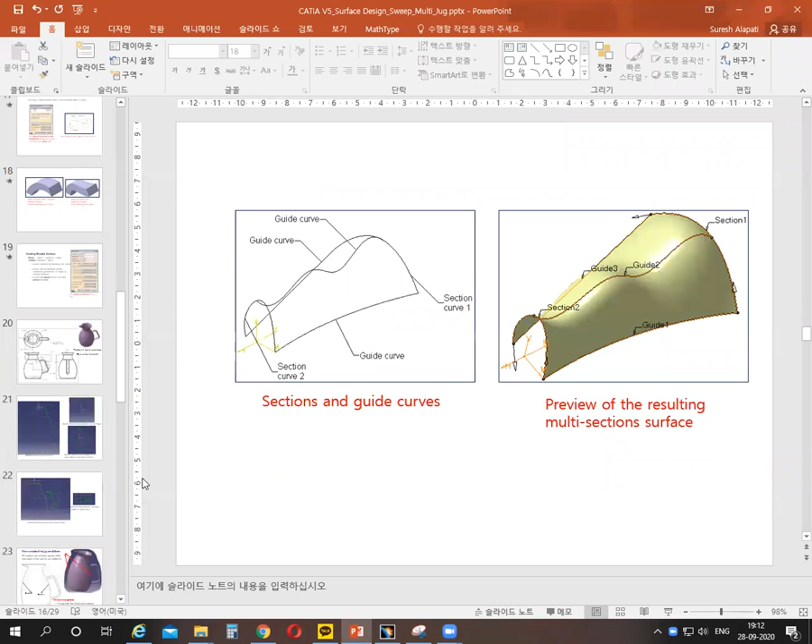Okay, after making the revolution, what we do is we have to make a multi-section surface. For making a multi-section surface, you need two sections, right?

One section is sketch, this one, here. The bottom sketch of diameter 90, and you need 2 points, here and here, because we are making points to connect the multi-section solid in a specific manner, using a guide.

So we need to create 2 points with the diameter 90 circle, and another sketch we have to make above that sketch, with the gap between these two sketches as 20 millimeters, and we make another sketch, this one, top sketch.

So like this, we join the top and bottom sketches using multi-section surface, by following a guide here. This is one guide, and another guide is given by closing point, closing point of this one and this one.

I will explain more clearly when we do this in CATIA. So first make this circle, 90 millimeter diameter, and 2 points, here 2 points.

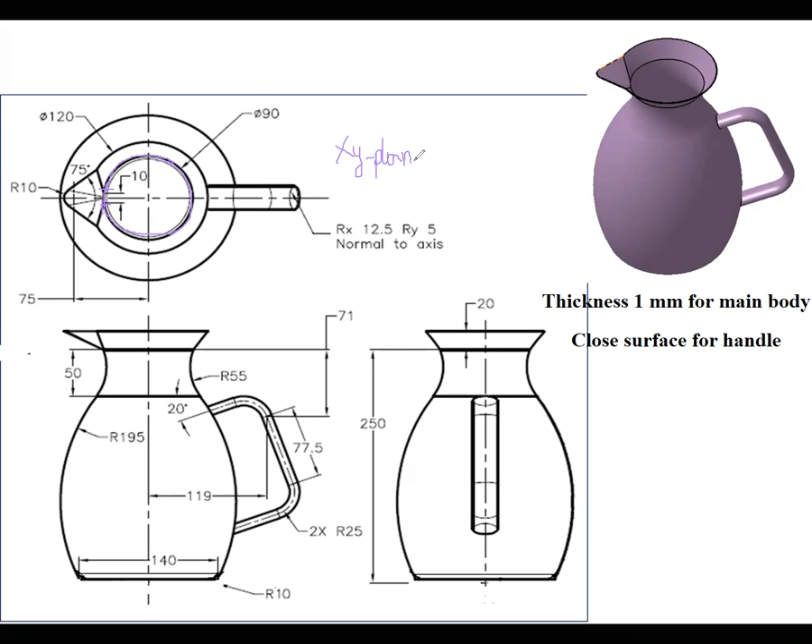We have to make it on the XY plane, because that is the top view. So after making the revolve, select the XY plane to make sketch 1 for the multi-section surface.

So we select a circle, center point of the circle is the same, 0,0, center point of the jug, center point of the jug.

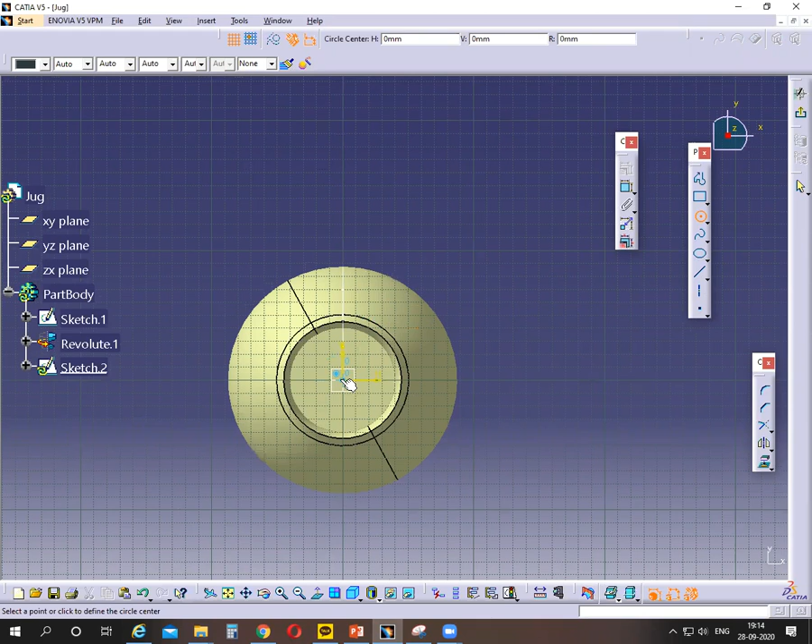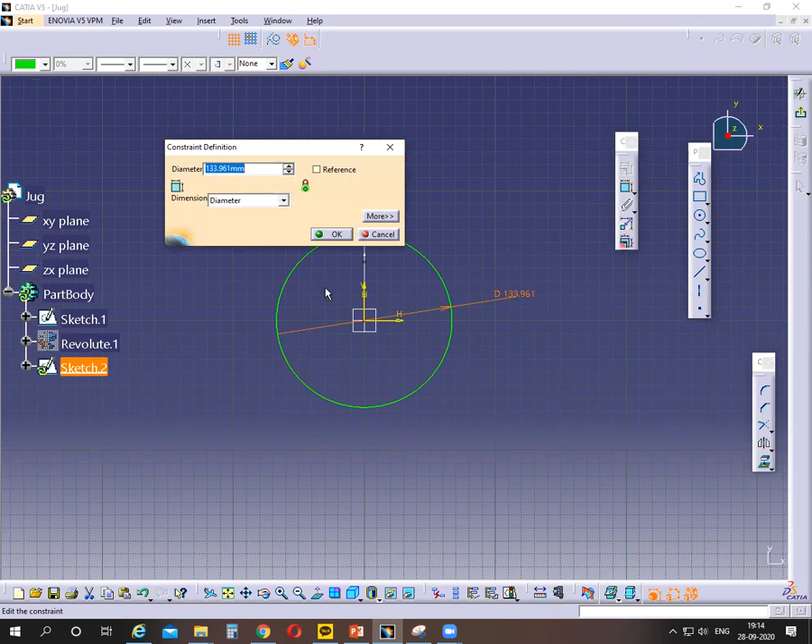So the diameter of this one is 90 millimeters. And here, opposite to the handle, we have to make a point here, not here, here we make the point.

So on the circle, that point is touching the circle, just left side or right side of the vertical axis. From the vertical axis to that point is 5 millimeters.

So you can make another point, or you can mirror this point, and give 5 millimeters, mirror is also possible. I'm making another point and giving the same distance from the vertical axis to that point, 5 millimeters.

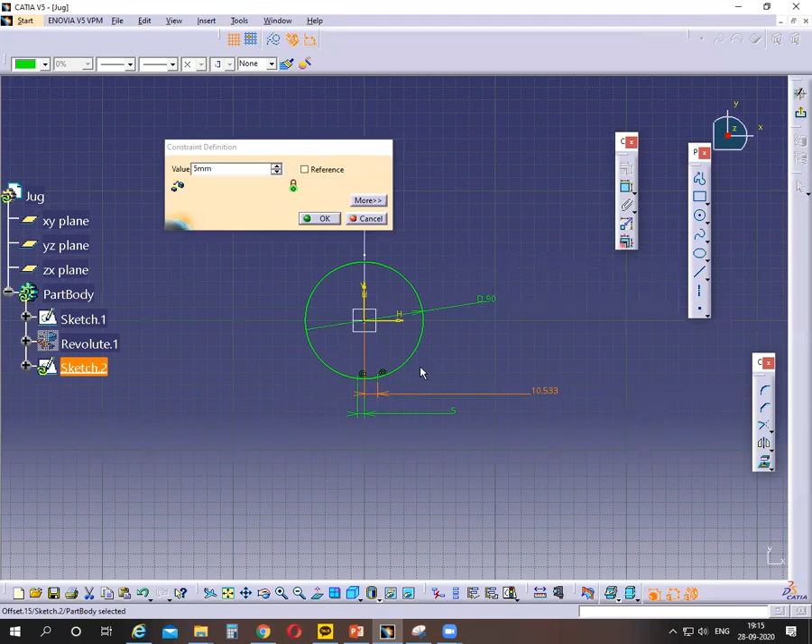So sketch 1 got finished for the multi-section, now sketch 2. This is one sketch for the multi-section surface, the bottom sketch, and I need to make another sketch, like this one.

So we have to make another sketch on a different plane. When we use a multi-section surface, we need to create sketches on different planes - same plane means the multi-section surface does not work. So we select the XY plane, here this is the XY plane.

From that plane we make another sketch at a distance of 20 millimeters, so we need to create a plane from that XY plane. After exiting the sketcher, we select the XY plane, because we have to create a plane at a distance of 20 millimeters from the XY plane.

So already 20 millimeters in the upward direction. Some people may have it in the downward direction, so we change the reverse direction, upward or downward. In this case, upward direction.

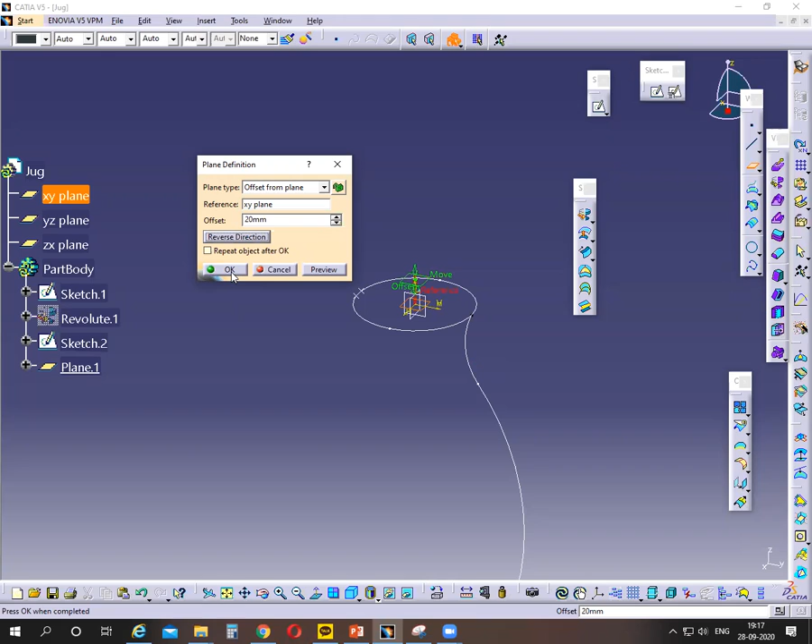And make sketch on that plane. So select the plane and make sketch. I make a 120 millimeter diameter sketch.

And first, how I make this sketch - I make the sketch lines at an angle of 75 degrees, half of the 75 degrees. Let's make this sketch.

The diameter of the sketch circle is 120 millimeters, the big circle diameter. So 120 millimeters.

After the 120 millimeter diameter, we make another small circle here. From the center point of the jug to the center point of the small circle is 75 millimeters.

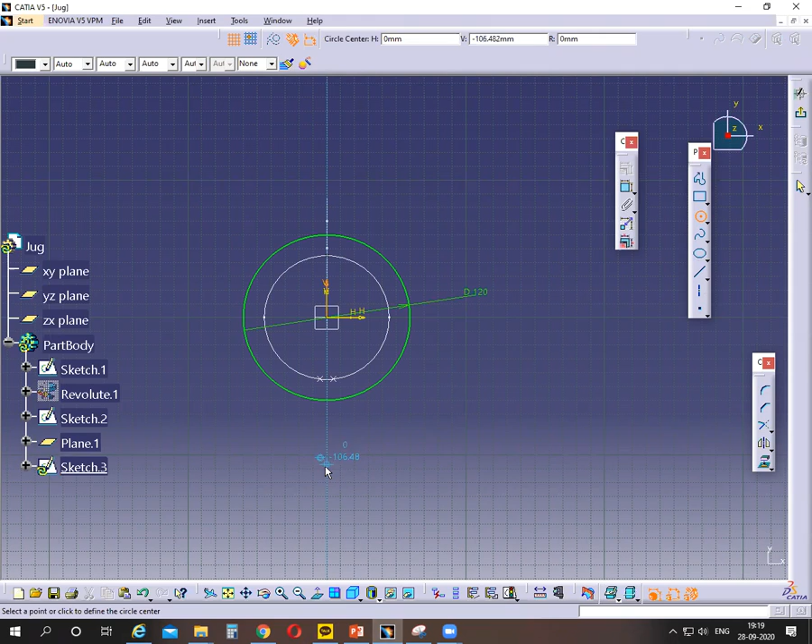So you have to make this sketch, the small circle, on the vertical axis. Center point should be on the vertical axis, not left or right of this, exactly on the center, exactly on the vertical axis.

Radius 10 millimeter, so radius 10 means diameter 20. You can also give the radius as 10 millimeter. And the center point of this circle to the center point of the jug is 75 millimeter.

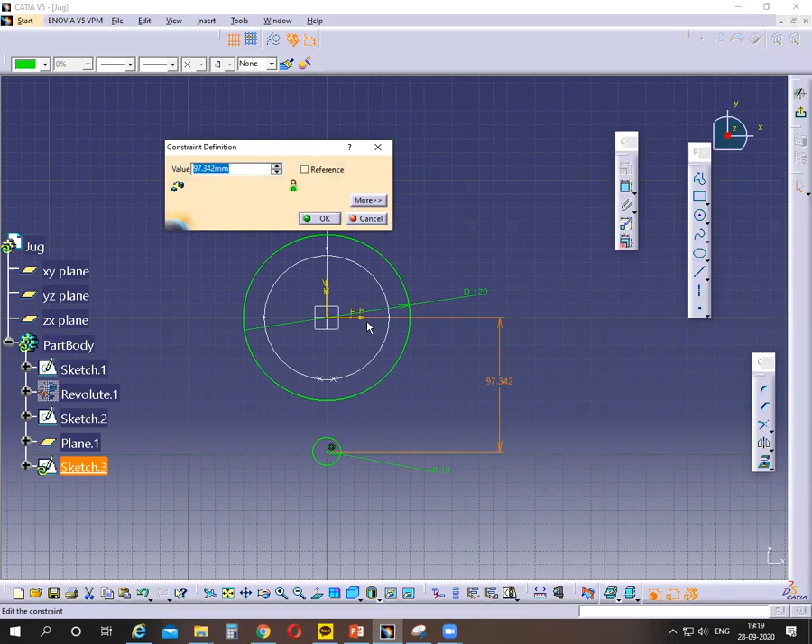And here we join these two circles by a line. Starting point is along that circle and ending point is on another circle. If you want to make auto constraint, yes, that should be tangent, or you can give it later. To avoid auto constraints, just touch on the circle.

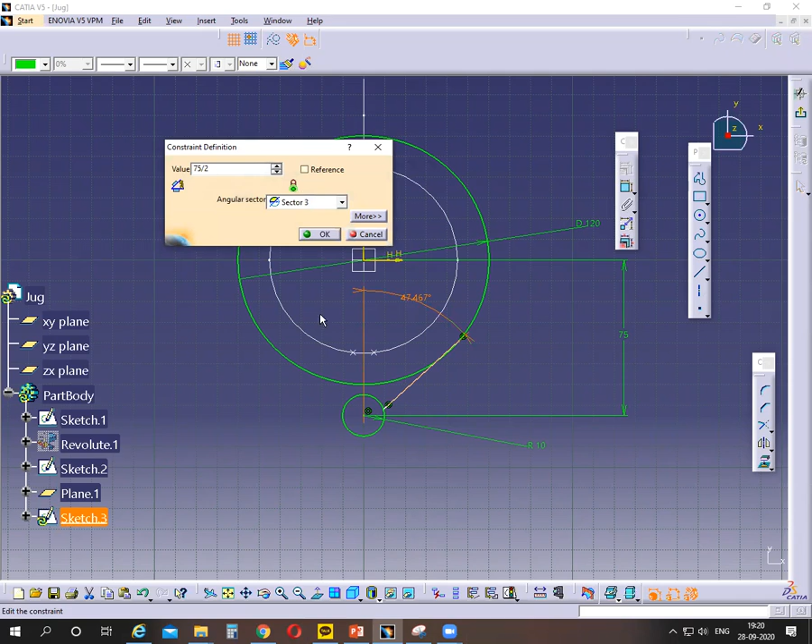So what is the angle? The angle between this line and this line is 75 by 2, 37.5, right? Because total angle is 75. From this vertical axis to that line, we have to select this vertical axis and this line together to give the angle constraint. So you can use 75 over 2 or just 37.5, and the software automatically calculates it.

So 75 by 2, and here there must be a smooth connection between this circle and this line. But here there is no smooth connection. Here no, but here it is a smooth connection, so we need to give a tangent constraint.

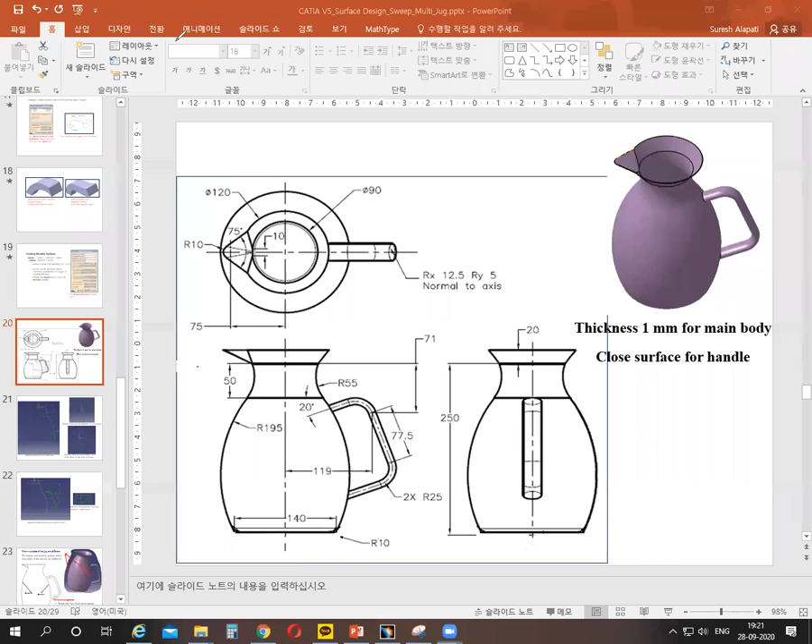If already given, you don't need to give it again, but if you want to give the tangent constraint, select this line and this circle, and give the tangency constraint.

If you want to make another line, follow the same procedure, or you can just mirror. I already provided the dimensions 37.5 and the tangency constraint, so then I can mirror this line to the other side.

So click on that line and click on the mirror tool in the operations toolbar. Select the line axis, the vertical axis. Click on the line you want to mirror, click on the mirror tool, and click on the axis with respect to which you want to mirror. That is the mirror option.

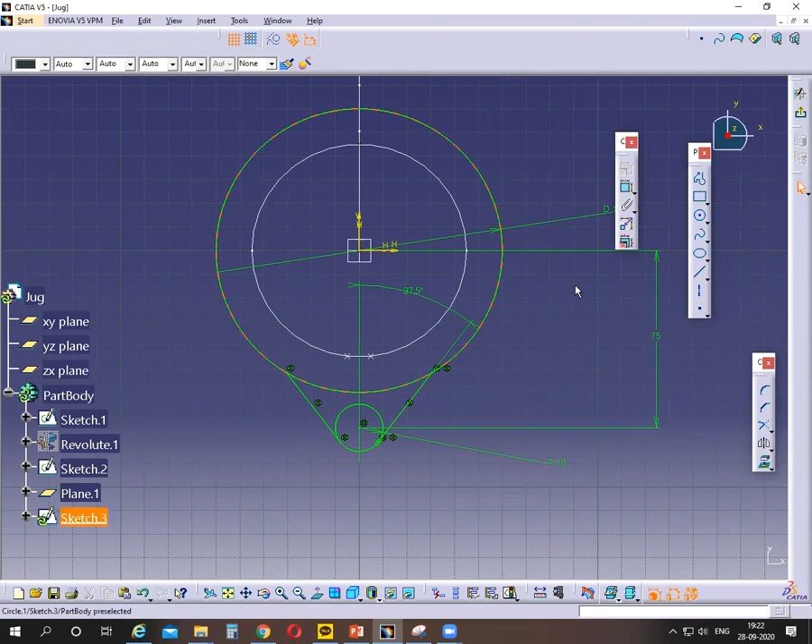Now I have to delete the remaining portions of the circle. I have to delete this one, this one, everything. So I use the eraser, quick trim. If you double click on this tool, or any tool, you can use it continuously, so you can erase this line and that line without clicking each time, since we have to do it multiple times.

Now I have finished sketch 1 and sketch 2 for the multi-section surface. I mean sketch 2 and sketch 3. Sketch 2 is the first sketch for the multi-section surface, and sketch 3 is the second sketch for the multi-section surface. After finishing this one, exit the workbench.

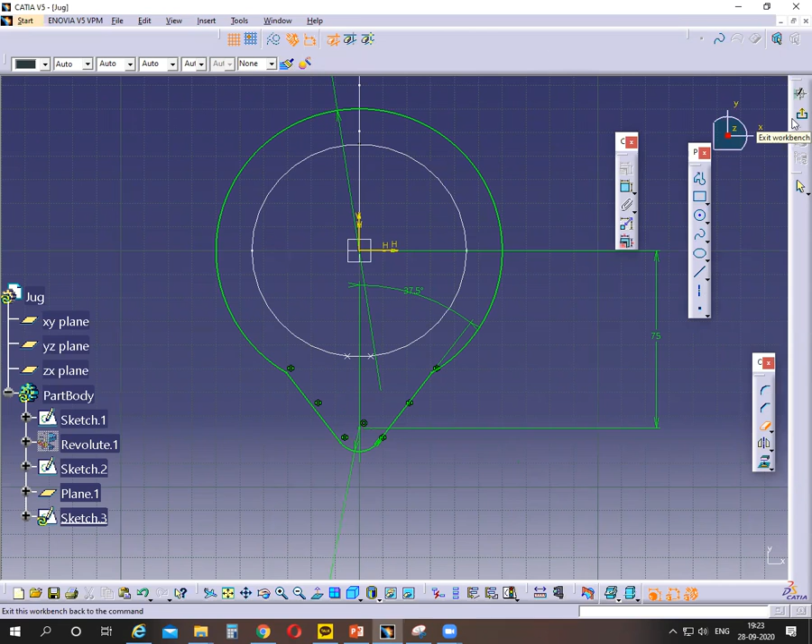Here we need to provide a guide, a line, because we have to guide that multi-section surface in a specific manner. It should follow these guides, like this one. So we can provide a guide, but only one guide, not both sides, either this side or this side. If you provide two guides, you will get a different multi-section surface.

So for the guide, I provide it using a line, because that is a straight connection. Using a line, select line, 3D line.

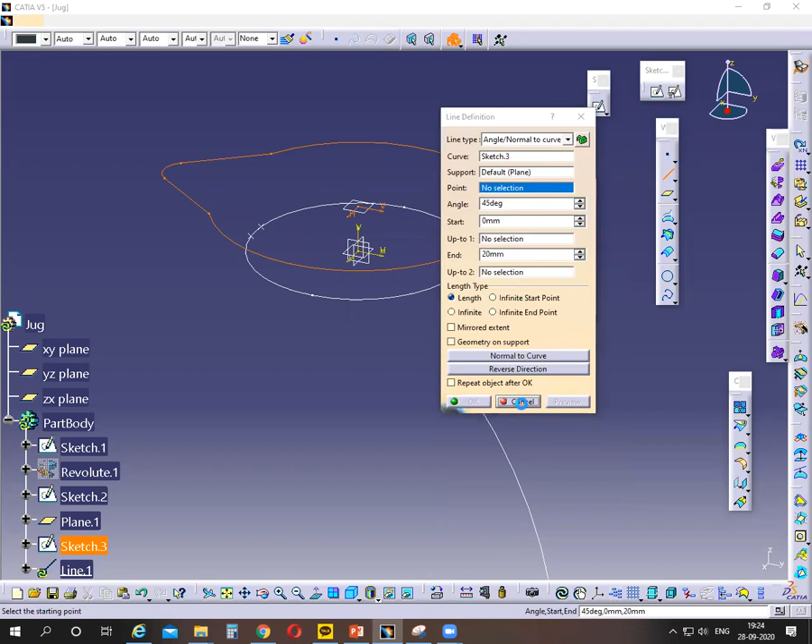So 3D line here. This one is a 3D line, not a 2D line. So 3D line, to join 2 points. If you select a point automatically, here the sketch 3 got selected, right? When you click on line, you will get some different option. But deselect the sketch 3 and click on line.

So the main option for the line type is point to point. So we have to select this point, and this point you created, right? So create this point. Just click on the point, not curve. Many people click on the curve. Click on the point, just point. This point, and click on this point you created. Not curve, point.

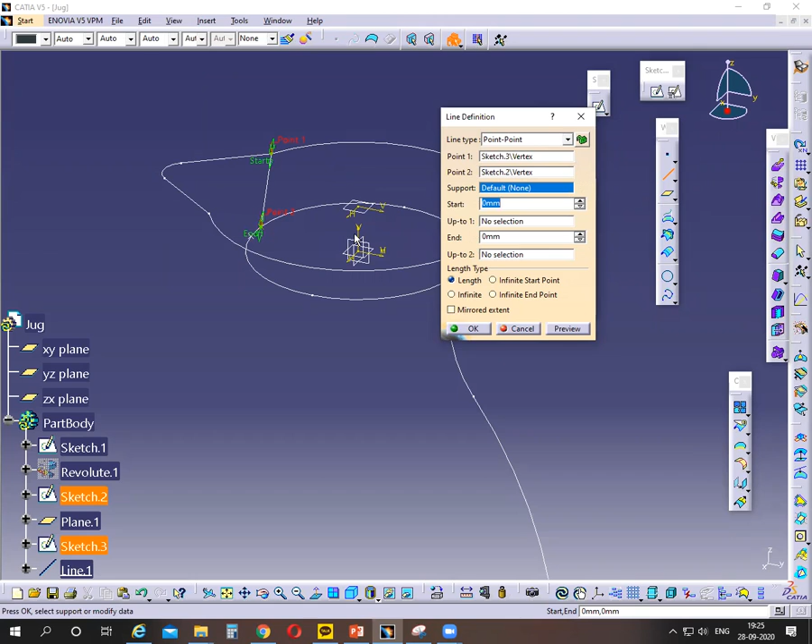So now I joined those 2 points using a line. That is a guide for the multi-section surface. So what I do is I select the multi-section surface tool, and select which sections I need to join using multi-section surface. So this one, sketch 2 and sketch 3.

Unfortunately, when you select section 1 and section 2, for section 1 the closing point is here, but for section 2 the closing point is here. But I have to make a connection like this one, right? So you need to change the closing point. Otherwise it is connected like this one, and you will get some different shape. So you need to join this point and this point, and that connection can be taken care of by this one.

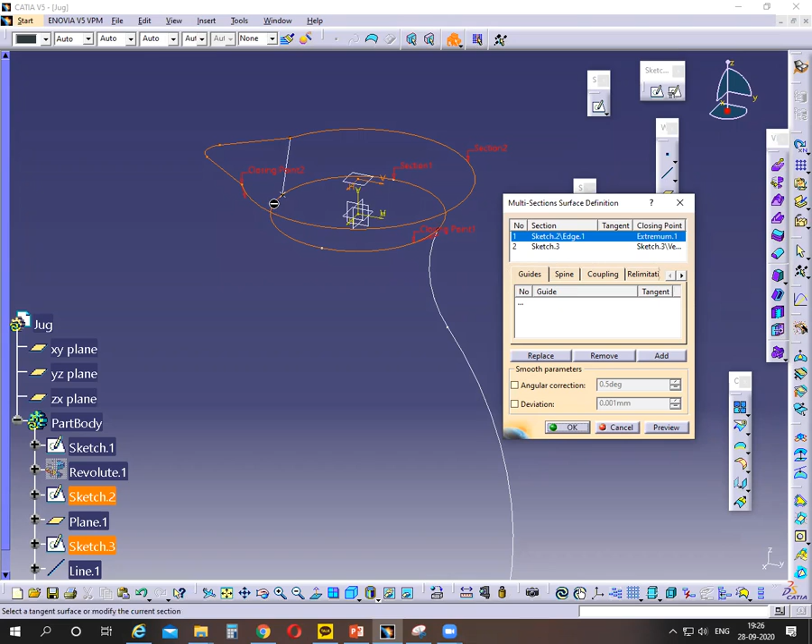Closing point. So replace that closing point. In V6 what you do is click on the closing point, and click on the point where you want to change it. But in V5, you have to right click on the closing point. Move the mouse there and right click there. I moved the mouse here. Do not click. Right click, and the replace option. I want to replace this closing point from here to here.

But in V6 it is a different option. You have to click on the closing point, and next you have to click where you want to change the closing point. So that is the only difference between V5 and V6. Remaining all things are same.

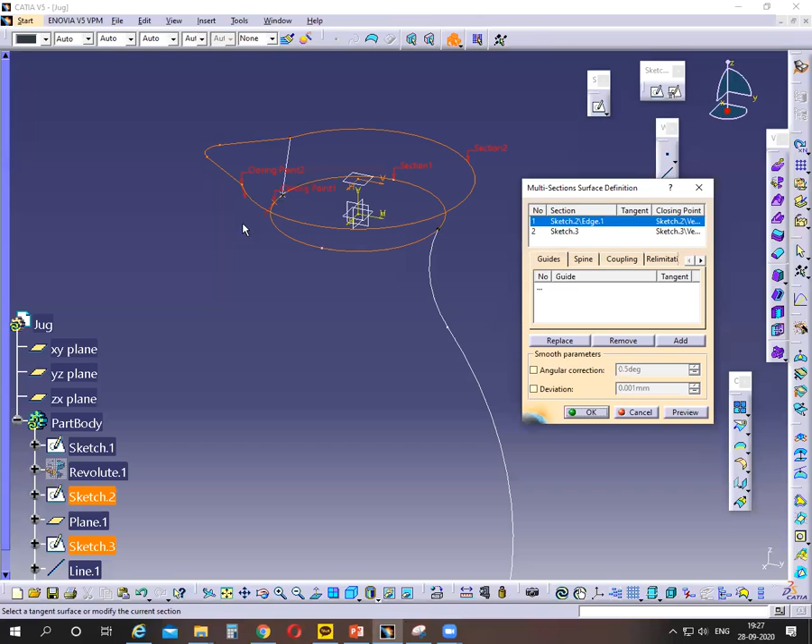And here some people may have different direction arrows. Now you see in my case the arrows of the closing points are pointing towards the left. But some people may have it like this one: this one is left direction and another one is right direction. We have to make both arrows in the same direction. So how to do that? We can click on the arrow.

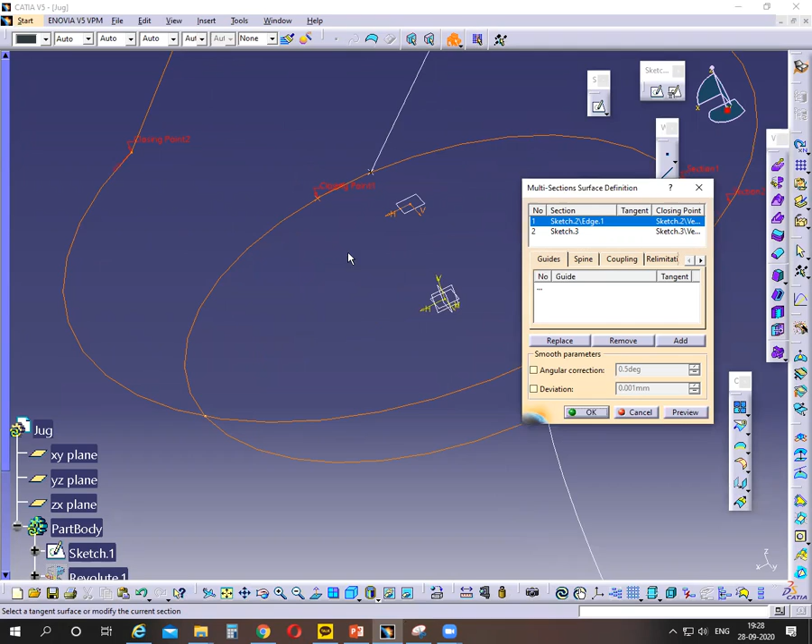Here the problem is I cannot click on this arrow. You can click on the arrow, zoom out, zoom in. Both arrows should be in the same direction, either leftward or rightward. When you click on the arrows, you can change the direction of the arrow. So yes, that is the multi-section surface.

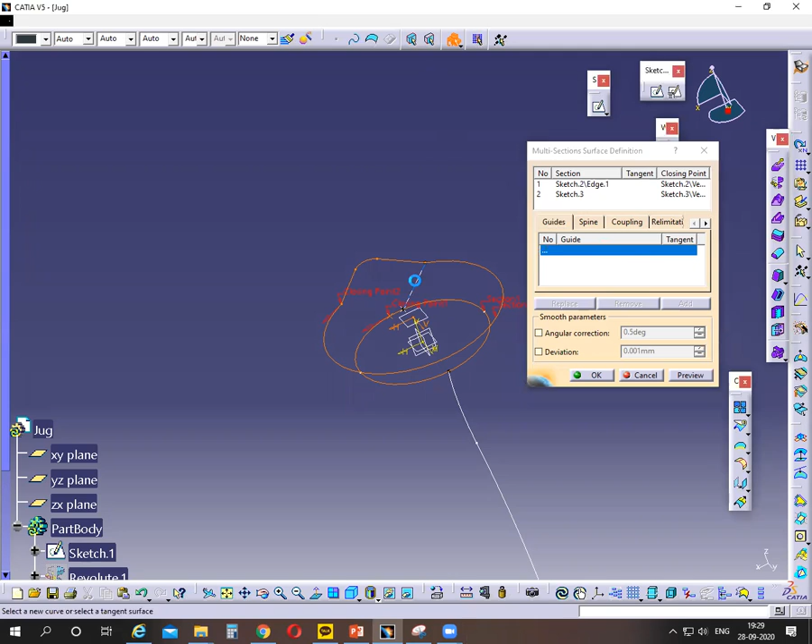You have to select this sketch and this sketch, and you have to change the closing point because I need to connect like this one. And another connection is given by the guide. So here, click on this portion, guides. You have to select a guide. Click on guides, and here select the guide, guide one, and click on OK.

So yes, this one is a multi-section surface for the top one. And I am hiding this revolute surface; you can show it. So that is about the multi-section surface. Last class we finished until here, right? We have finished until here.